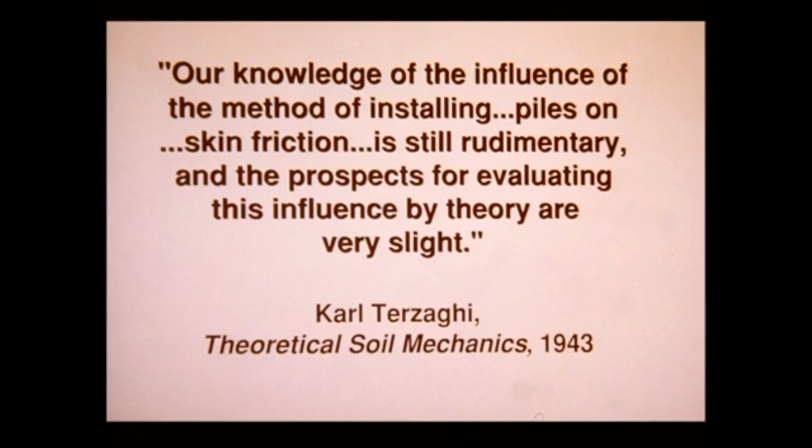Terzaghi admitted he didn't know much about skin friction, as he termed it. He developed a few graphs based on earth pressure theory, but he apparently didn't have much confidence that they were of practical use. Instead, he admonished his peers and students to perform site-specific load tests to measure skin friction, which of course remains good advice for us today.

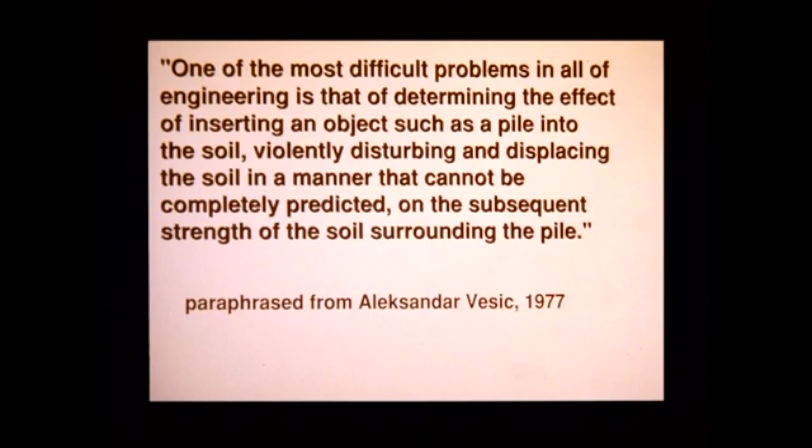Years later, Vesic expressed his appreciation of the difficulty of attacking the problem of pile resistance analytically, somewhat differently. Building on earlier work, he conceived and promoted the concept that the stress field in the vicinity of a pile could be estimated by invoking a relatively simple theoretical model in which we envision the soil to act as if it were being thrust outwards by an expanding cylindrical cavity. While that version of the theory didn't lead directly to practical solutions, it did provide a framework for understanding some of the soil properties that have a strong influence on skin friction, and we will from time to time refer to that theory.

An entirely different way of dealing with the problem might be to emulate our colleagues in other cultures by appealing to the piling deities before we begin construction. Sometimes when we deal with piling, this offers the best opportunity for success, but today we'll leave this approach to those who have employed and practiced it, and go on to some other solutions.

Coming to the present, I was privileged a few years ago to introduce Roy Olson as a Terzaghi lecturer. Roy is in the audience. I hope he doesn't mind me speaking of him, but he's an engineer who's had considerable influence on the development of methods for the design of axially loaded piles. When I asked him about the topic of his lecture, he told me he would speak on consolidation, for which, of course, he's also very well known and respected.

Roy told me he'd had considerable thought about talking about piles, but he'd finally decided he didn't want to open up what he called that can of worms. Well, considering the old fools and angels line, I decided that since Roy passed on the opportunity, it might be interesting at least to try to peek into the can of worms.

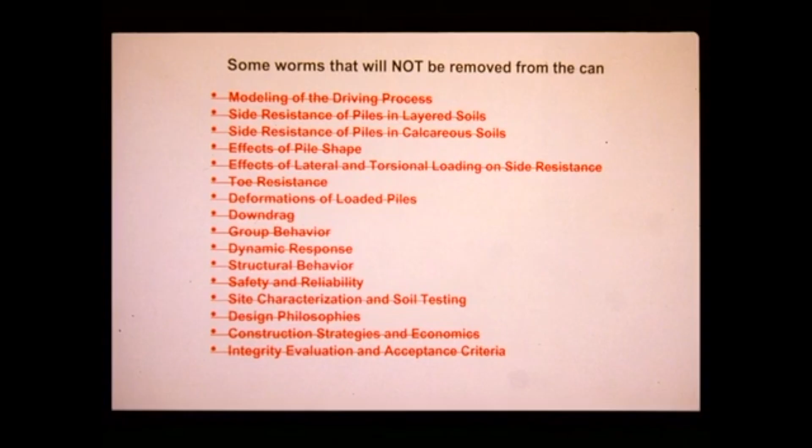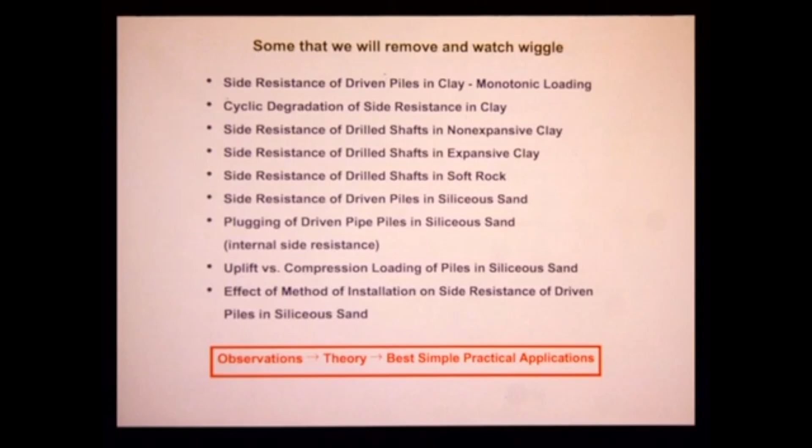So here we go. First of all, the problem of getting a comprehensive handle on side resistance, the term I'll use instead of skin friction, involves too many topics to cover today. I think it's appropriate right off the bat to declare what we're not going to cover. Not that these issues aren't important, but I'll leave them to other times. Considering the fact that my original version of the Terzaghi lecture ran about an hour and 25 minutes, I'll spare you some of these and we'll catch the main ones.

First, we're going to take a look at this topic of side resistance, looking at this little red box at the bottom, which I think is rather important. For you students, this is a good indication of how research is done, how engineering is done. We learn about engineering not from developing some grandiose mathematical model and then going out to verify it in the field, but rather we observe things. We try to use inductive reasoning to find out the underlying principles. So we go from what we observe to the underlying principles. We develop some sort of model, I call that theory, and from that we come back down using deduction to develop design inferences. So induction, deduction is the way we normally think.

Now, a lot of academics may not agree with this. Perhaps my opinions in this matter will provoke debates and spitting contests, but I think this is one of the purposes of a Terzaghi lecture. In our profession, the purpose of theory is to expand and generalize our observations and finally to help us produce guidelines for design, and I want to follow that theme throughout.

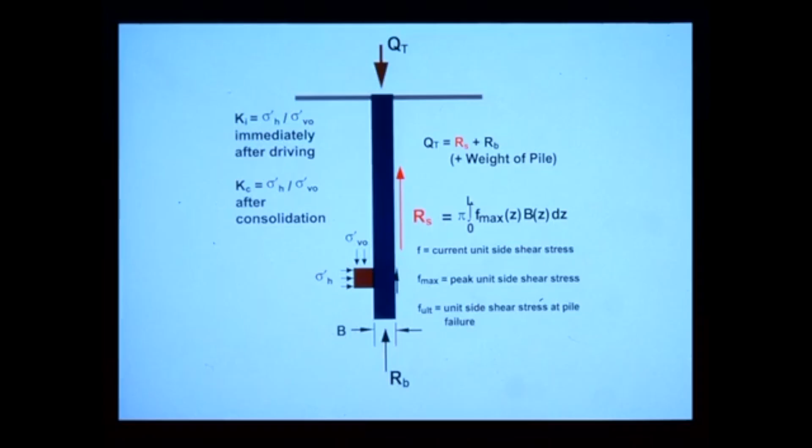The rub comes in evaluating these effective stresses, which can perhaps be estimated from the ambient vertical effective stresses, sigma prime V naught, and the earth pressure coefficients, which I term either K sub I or K sub C, and the shear strength parameters of the soil. I'll refer to K sub I and K sub C respectively, the earth pressure coefficients related to conditions immediately after installation and to conditions after all pore water pressures have stabilized, or after consolidation. Knowing these parameters, we can compute the peak unit side shearing resistance, which I term F max, as a function of depth, and then integrate that resistance over the surface of the pile to evaluate the total side resistance, the resisting force R sub S.

There are some complicating factors about this that make it not quite so simple, especially related to progressive failure that we'll look at later. One issue motivated by offshore development in the last 25 years or so is making static estimates of the resistance of very long driven piles in cohesive soils. To be sure, our static estimates can be improved by performing stress wave analyses on piles as they're driven, but pile lengths need to be ordered and construction operations have to be planned before such measurements can be made. So despite recent high-tech advances, stress wave analysis primarily, we still can't get around making estimates of R sub S from soil properties and good engineering judgment, perhaps.

Let's consider what Meyerhof had to say on the subject in his 1975 Terzaghi Lecture, published in '76. He described the underlying phenomena and then suggested the alpha and beta design methods for driven piles in saturated clay. In the alpha method, which is a total stress method, the changes in effective stress and soil structure brought about by the driving of the pile, and the effective stress path of the soil along the pile that it undergoes during installation and loading, are all collapsed into one factor called alpha, which in both derivation and application is empirical.

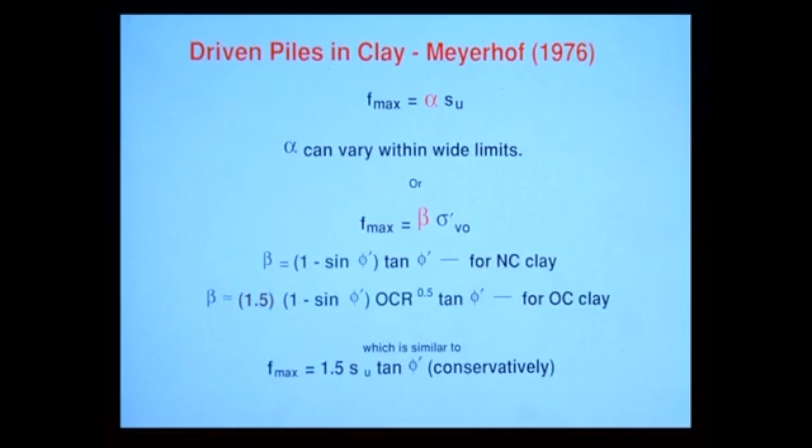So I've inserted the empirical multiplier of 1.5 here. I don't believe that Meyerhof was ever that specific, and it'll have some influence on some comparisons I make a little bit later. So that 1.5 is my factor and not his. But as the story unfolds, we can get a sense that the predictability of F max in over-consolidated clays may be a bit more uncertain than in normally consolidated clays.

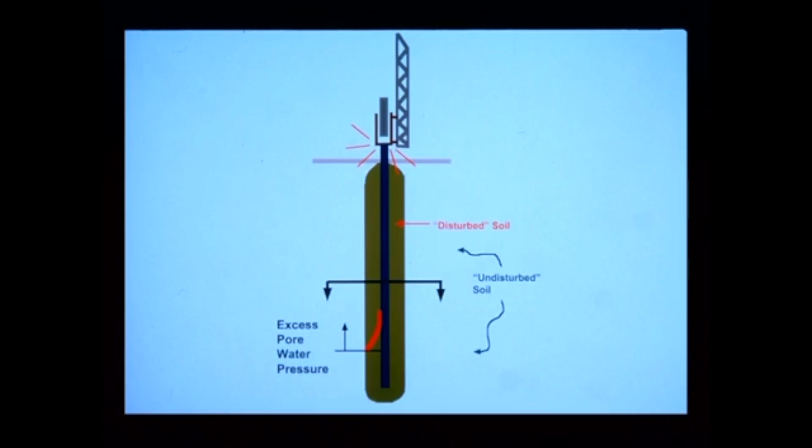You've got both the total stress and the pore water pressure changing. The elastically stressed soil in the blue, outside the disturbed or plastic zone, acts to restrain the plastic soil with perhaps something like a constant lateral stiffness. At least that's one view of the problem. Again, we'll assume for now that F max is proportional to the normal effective stress at the interface at the time the pile fails under axial loading. We're automatically assuming that the driving process destroys any cohesion that might exist, so the problem is completely frictional.

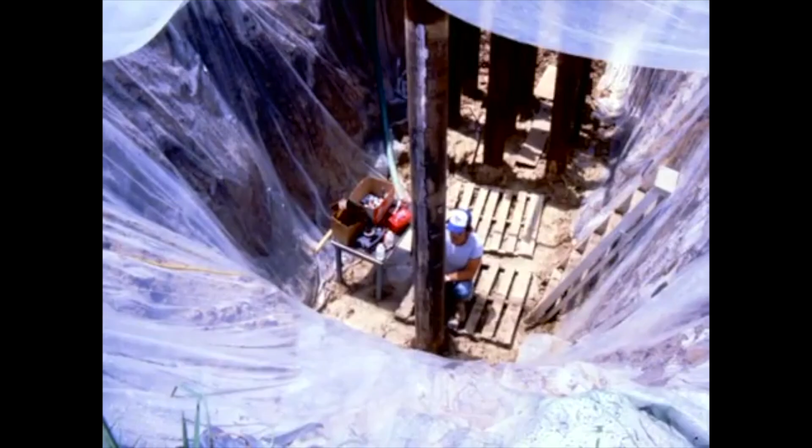Now, pursuing my observation-before-theory theme, some years ago we measured earth pressure coefficients in the ground at rest and against five heavily instrumented driven piles, and they were all closed-toe pipe piles, I might add. The site, which was in Houston, consisted of saturated clays of varying plasticity and had been over-consolidated by desiccation.

Consider this slide. These are our average measurements of earth pressure coefficients versus depth. The red line on the left is K naught. We can see that K sub I is clearly 2 to 3 times K naught near the middle of the pile -- that's after the pile has been driven. And K sub C is a little bit higher than K sub I.

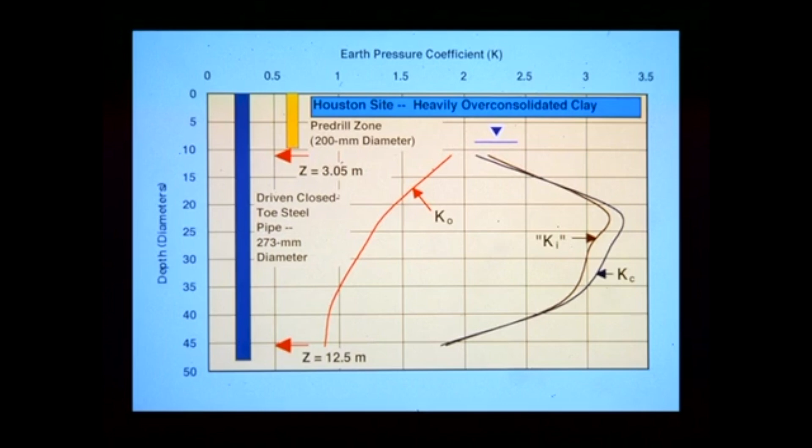I put K sub I in quotes here because by the time we could read the total and pore pressure cells, a good bit of pore pressure dissipation had already taken place, so that's really not the true value. As I say, K sub C was slightly larger than K sub I throughout most of the pile, indicating that the consolidation process resulted in an increase in effective stresses against the pile, which would of course imply time-dependent setup, which we were in fact able to measure. Remember, this is a rather heavily over-consolidated, very stiff clay.

With that sort of observational information, one is tempted to proceed directly from K sub C to F-max. For example, we can assume that there are no changes in pore pressures against the piles in the over-consolidated clay during slow monotonic loading, and that the highly disturbed clay is in a residual strength state, no cohesion. These assumptions let us invoke the equation in the blue box to calculate F-max.

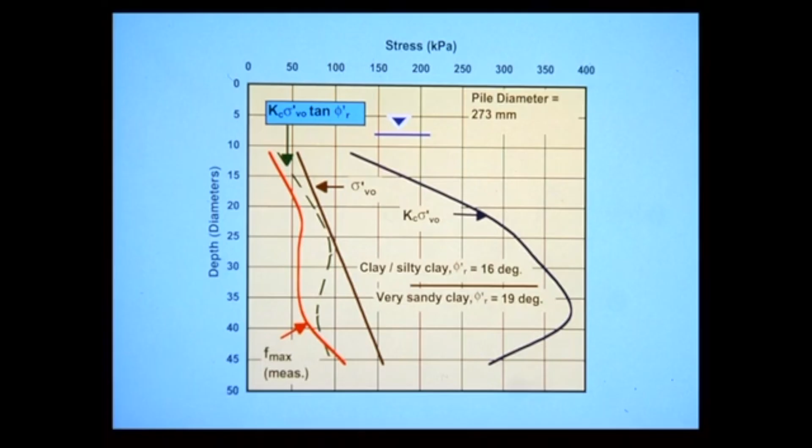If we measure K sub C, we use the residual effective angle of internal friction. Sigma prime V naught is a rather easy quantity to measure. We can make a prediction of skin friction versus depth, shown here in the dashed line. In fact, we're mildly successful in reproducing the measured values, shown in red, by doing this, but of course not completely, as we can see. This exercise demonstrates the importance of the parameter K sub C.

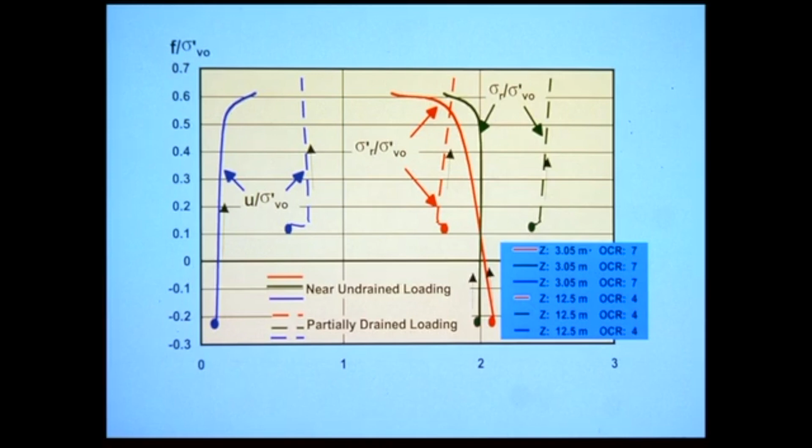If we look at the stress paths measured during compression loading of these piles, we see that our assumption regarding changes in effective stresses is not quite valid. In the upper part of the piles, where the clay is plastic, denoted by the solid lines, pore water pressure increased during shear loading and effective stresses became smaller, possibly explaining in part the over-prediction of F-max by the simple equation on the previous slide. Near the bottoms of the piles, where the clay was less plastic, rather sandy, denoted by the dashed lines, pore pressures and effective stresses were about as assumed. Very little change during loading.

Well, we seem to be getting a handle on the problem, right? Well, if we expand our view a little bit, things look somewhat different.

A consortium of oil companies sponsored a major load testing program for deep penetration piles in the UK a few years ago. A pile 0.76 meters in diameter, driven open-ended but plugged to a depth of about 59 meters, was tested at an over-consolidated clay site called Tilbrook Grange near Cambridge.

Our test on much shallower piles in Houston, in a formation known as the Beaumont clay, exhibited normalized stress paths that seemed to converge to a straight line along the point of slippage. These arrows indicate the Houston tests here. These two solid lines are the stress paths. But no such proportionality existed at the measured slip points for the Tilbrook test, here and here.

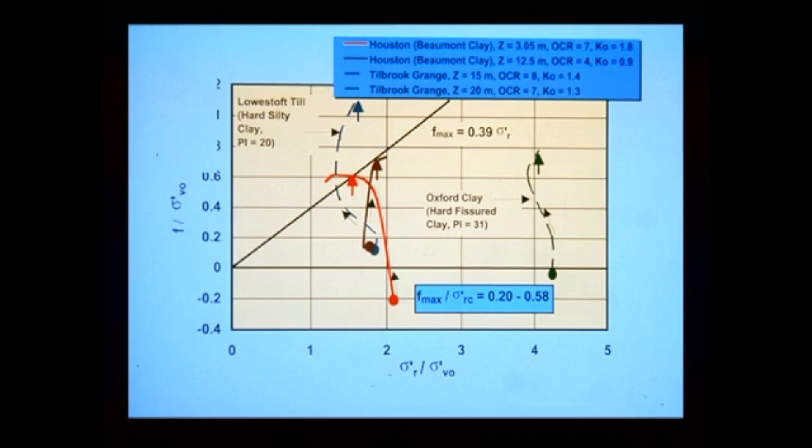Almost a reverse proportionality. There may have been a considerable true cohesion component of shear strength in the upper till, for some unexplained reason. We don't know.

The point is that the angle of wall friction between the soil and the pile may have been vastly different between the upper and lower parts of this formation, a theory that some people have advanced. But these two sets of tests in over-consolidated clay don't really show any discernible pattern in their normalized stress paths, suggesting that our simple K sub C sigma prime V tan phi model may not be too useful after all, and suggesting at the same time that the beta method, which works with effective stresses, carries with it considerable uncertainty in this type of soil.

And if you haven't noticed by now, I think I'm beginning to set up Professor Duncan's lecture.

Or perhaps the measurements at one or both sites were faulty. There's no evidence that this happened, but these measurements are difficult to make when you start to try to measure, particularly total stresses against piles or effective stresses. Any analyst, you people who work with finite element models and so forth, should be very cautious when assuming that the measured stresses or displacements against piles in soil masses are the ones you absolutely should be testing your analytical model against, because experimental measurements can be in error as much as your analytical model.

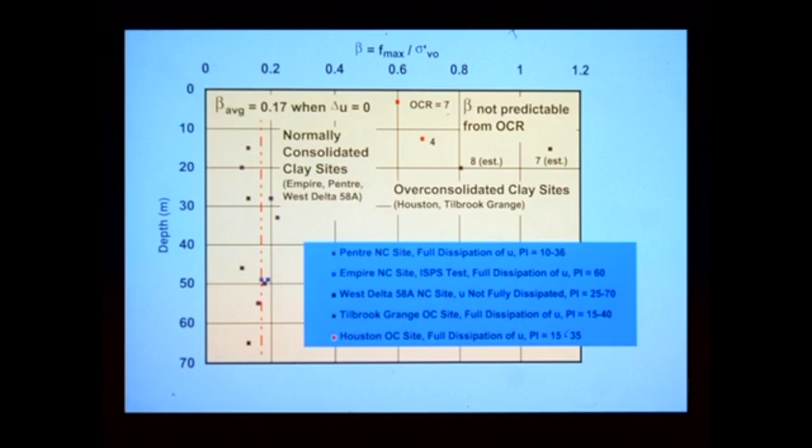Well, to put things in perspective, we measured values of beta versus depth for long full-size steel pipe piles at 3 normally consolidated and 2 over-consolidated clay sites. Beta appears to be nearly constant on the left for soils that are nearly normally consolidated, at a value of about 0.17. In over-consolidated clay, however, they're all over the place. This is for the Houston site and the Tilbrook Grange site, the two we've just talked about. Beta just doesn't appear to be a predictable function of either depth or overconsolidation ratio.

So at this point, our observations sort of fail us, and it's time to turn to modeling. The first efforts at purely analytical solutions for this problem in clay, particularly saturated clay, were sponsored by the oil industry to predict side resistance of very long piles, for which very little empirical data existed in the 1970s.

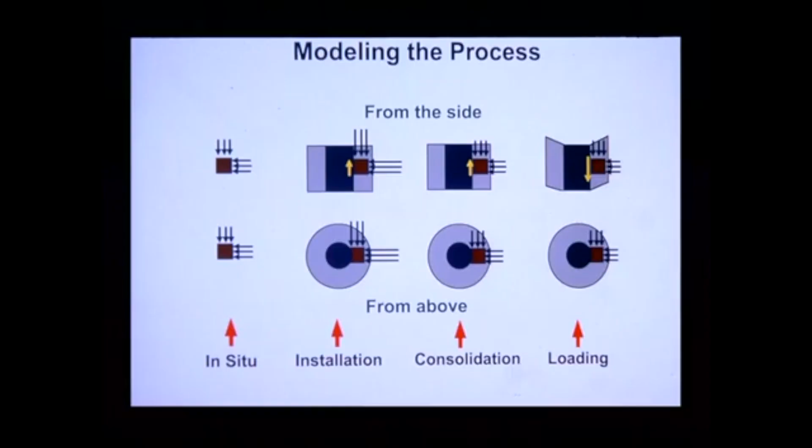The stresses change, usually reduce, and we'll let this image represent that. Most subsequent analytical models have gone through the same sort of process, although the particular procedure for modeling these effects are considerably different. Finally, we have the effect of loading over here in the fourth slide. This model was known widely at that time as the General Effective Stress Model, or the GESM.

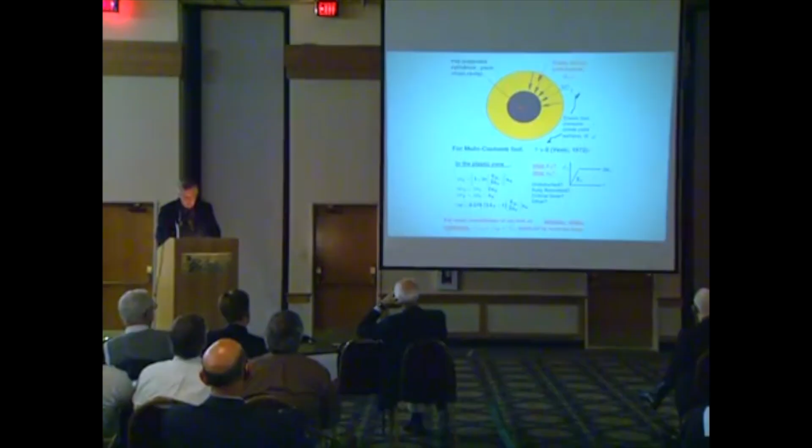Installation was modeled by the undrained expanding plane strain cavity method. The mean effective stress in the plastic zone was equated to the mean effective stress at the critical state at the void ratio encountered in the free field, which was then reduced empirically. It had to be, because it didn't work otherwise, by a factor of 0.6 to account for the extreme remolding that occurs in the driving of displacement piles. So we do have an empirical insertion into this otherwise completely analytical model.

The mean total stress came directly from elastic plastic von Mises procedures that are depicted here, and that mean stress was dependent upon the Young's modulus and the undrained shear strength of the soil. Of course, there could have been uncertainties about what value of S sub U should be used, undrained shear strength, and what value of E sub U should be used. There are obviously many possibilities, and so the method in terms of translating practical information to predictions of capacity has some uncertainty in it.

Radial consolidation was then modeled by considering the framework of the soil in the plastic zone to be elastic, compressible, and isotropic. The modulus of the soil varied in a radially nonlinear manner from a small magnitude at the pile surface to its undisturbed value at the outer edge of the plastic zone.

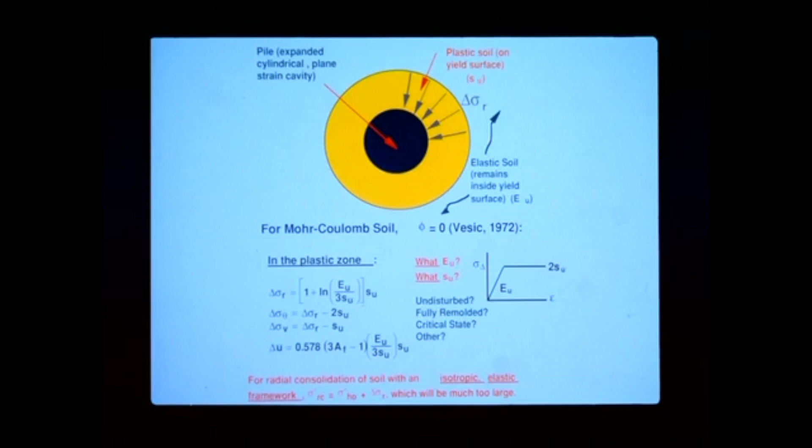With this assumption, the increase in mean effective stress at the pile-soil interface during consolidation was about a third of the initial excess pore water pressure that was generated due to pile installation. The soil is at or relatively near the critical state line after consolidation, according to this model. So it was assumed that at the interface, the mean effective stress at failure is equal to the mean effective stress after consolidation. Tests in Houston showed that's probably not quite true.

I'm personally more familiar with what we call the VECONS/AXIPLN model, which was developed by a student of mine, Heydinger. It's similar, very similar to the GESM, but it has a different way of including the empiricism. It empirically considers the soil in the plastic zone to have anisotropic stiffness rather than isotropic stiffness, with a ratio of tangential modulus to radial modulus of about 2.

Otherwise, the numerical solution of Leifer, which was used in the GESM, was also used to compute the effective stresses at the end of consolidation in this particular model. And what we see here are the conditions after pile installation, which represent the initial conditions for the consolidation modeling.

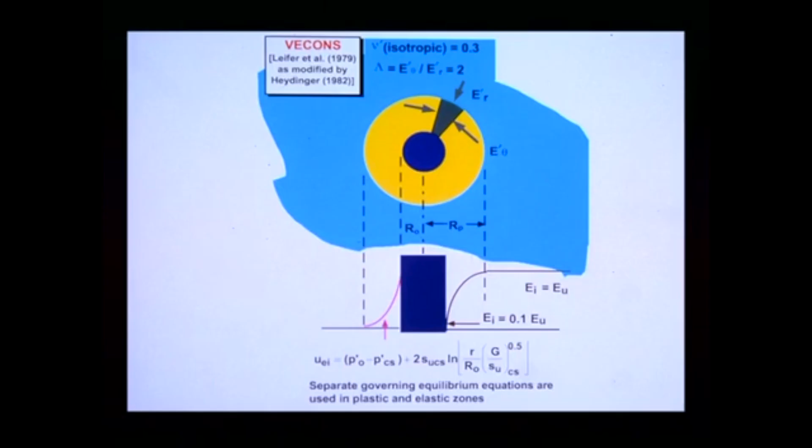If we used a constant isotropic Young's modulus in the yellow zone, the disturbed zone, we slide directly back into Terzaghi's one-dimensional consolidation theory and are forced to conclude that the change in effective normal stress on the face of the pile during consolidation is equal to the initial excess pore water pressure. Observations tell us this doesn't happen, that the effective stress changes are usually not that large. So as a minimum, it's necessary to use a model such as the GESM or VECONS with radially varying moduli to reproduce at least approximately what we observe.

This is a typical result from VECONS for the Houston overconsolidated clay site, which I talked about earlier. For reference, the ambient effective stresses are indicated along the right axis - here, the vertical stress and the horizontal stress. The horizontal stress at this site being slightly greater than the vertical stress at the depth at which we're doing the modeling. We predict significant increases in all three major principal effective stresses near the interface.

The biggest increase between driving and end of consolidation occurred in the tangential effective stress direction, because more volume change occurs near the interface where the greatest pore water pressure dissipation takes place, leading to arching of stresses in the tangential direction, particularly if you make that direction stiffer than the radial direction.

With this model, the radial effective stresses against the pile wall are about 2.4 times the ambient horizontal effective stress in the ground, which is consistent with the observations that I talked about earlier, which we made on the test piles. After determining these relations, Heydinger computed Fmax with a finite element code.

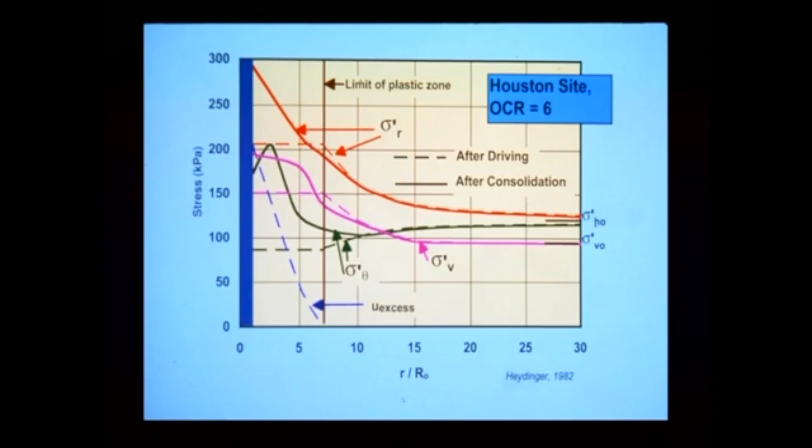The predictive results for VECONS for driven displacement piles and saturated clays with various stress histories are summarized here. The model appears to be reasonable over a fairly wide spectrum of soils, but again, it contains empiricisms.

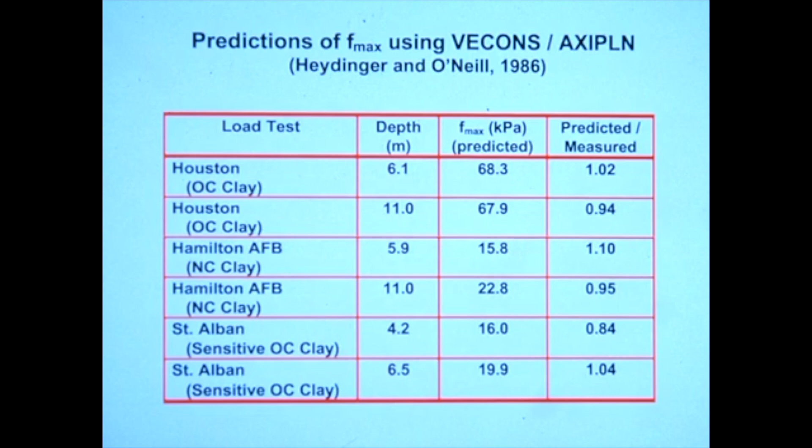A significant advance came with the coupling of Baligh's strain path method and the MIT E3 constitutive model in the late 1980s by Whittle. The strain path method offers a better solution for strain changes in soil around a pile as it penetrates, using the theory of analogy of a viscous irrotational fluid flowing past a blunt fixed object. It's very different from the cylindrical cavity theory used in previous models, the cylindrical cavity that just magically expands. We realize that's not what happens when we install a pile.

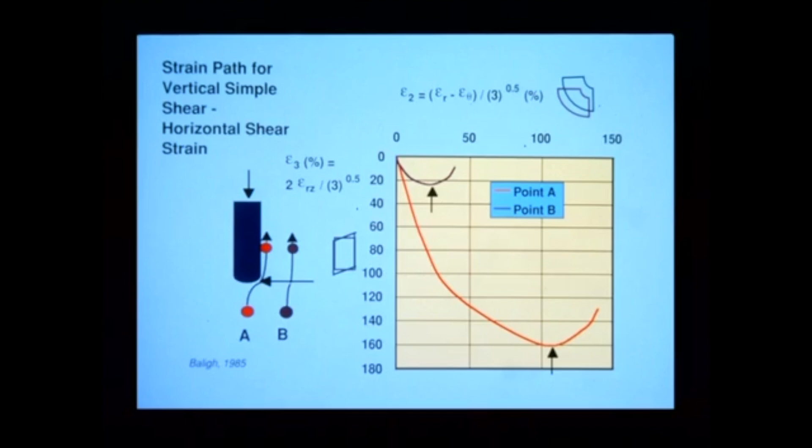The E3 constitutive model tracks those strains by assuming the soil is completely nonlinear. Irrecoverable strains are generated when stresses are reversed, which happens in many soils. It then tracks the stress-strain behavior of the soil framework as it consolidates around the pile during loading in a finite element environment, pretty much like the other methods, except that it uses a different constitutive model. There's no need in this model to assume any anisotropy in Young's moduli or any variations in Young's moduli with radial distance, as was done in the previous models.

This model predicts beta of about 0.10 for normally consolidated Boston blue clay and about 0.21 for lightly overconsolidated Boston blue clay, which pretty well bracket the values of 0.17 that I showed on the slide before. In fact, on the slide before, the values vary from about 0.1 to 0.21. So if we agree that some of the soils in those tests were slightly over-consolidated and not truly normally consolidated, then they're behaving much like the Boston blue clay would be predicted to behave using this model.

It's in this model, by the way, or in the beta method, if we apply this model to calculate beta for the beta method, it's extremely important that we know what K0 is. We need to be able to compute beta with a confident value of K0.

This model shows what happens when we try to put it into practice. It shows, first of all, that the radial consolidation of soil with a vertical shear stress, a residual stress against the pile, will produce a higher value of F-max than without a vertical shear stress, provided the subsequent loading doesn't reverse the direction of shear stress. Whittle analyzed, among other things, a series of uplift tests, which I've tried to summarize here,

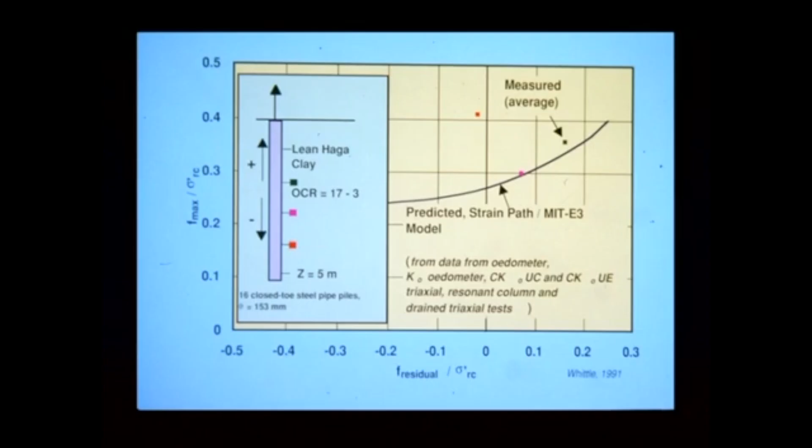The discrepancy at that point, which was the lower measuring point, was speculated to be the result of the layering and the boundary effects emanating from the toe, where you had an over-consolidated clay overlying a normally consolidated clay.

But here, nonetheless, are the range and measurements of F-max along the middle of the pile among the 16 identical piles that were tested. We compare the measurements and the predictions. The predictions by the MIT E3 model are completely theoretical. There's no empiricism built in, and we can see that it does a fairly good job of predicting what was measured if we forget about what's happening down near the pile tips.

We also see the prediction way over here, almost off scale, of the beta method that was proposed by Meyerhof. In this case, beta overpredicts F-max considerably, while the analytical method provides a greatly improved estimate in this over-consolidated clay.

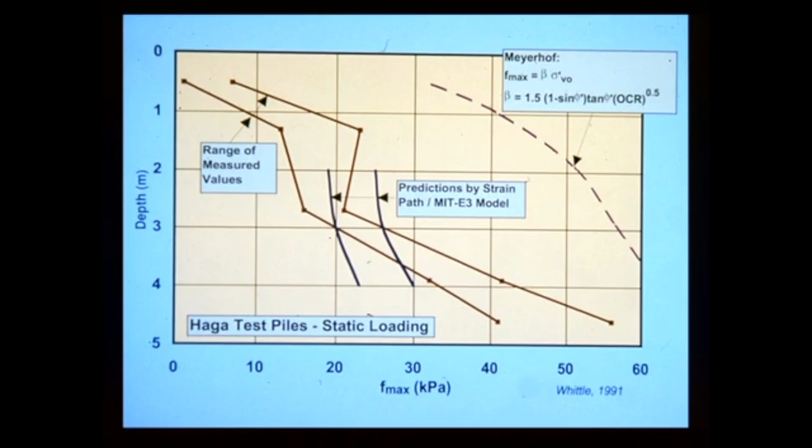Now that was a long worm. Remember, we're looking into Roy Olson's can of worms here. I want to extract a shorter worm.

The design value of unit side resistance, F ultimate, may not always be equal to F max, which we would predict by one of these models, or predict from load tests on short piles, because of strain softening perhaps and progressive failure as a compressible pile is loaded. There may also be a more subtle reason why F ultimate is not always equal to F max all along the pile, and it has to do with the installation process.

Here are the results of several compression loading tests on closed toe steel pipe piles, model piles, in uniform medium stiff clay. In this case, the piles were driven to a shallow depth, load tested to plunging failure, driven deeper, load tested to plunging failure, and so forth, all the while measuring the skin friction, end bearing, and such.

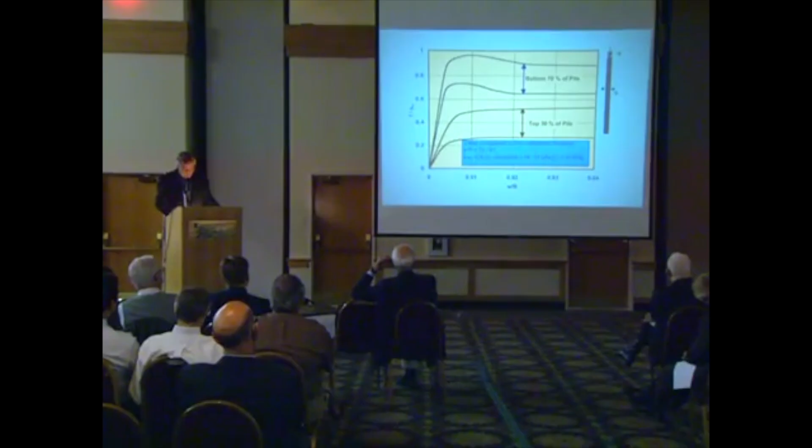Whatever the depth of penetration, F max in the upper 30% of the pile was always less than in the bottom 70%, regardless of the depth of penetration. This effect could be due to extreme destructuring of the soil at the interface from large accumulated strains, to reduced effective stresses from lateral expansion of the pile as the axial stress wave passes down, or to lateral motion of the pile from flexural waves produced by off-center hammer strikes, or a combination of these factors. These data suggest that R sub S, the shaft capacity, is about 15% less than one would obtain by integrating F max over the perimeter of the pile.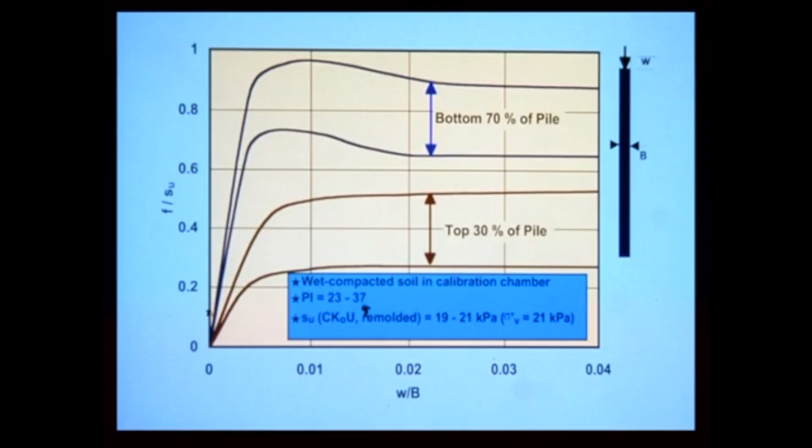If we assume, and this is not quite a correct assumption, that failure only progresses down from the head of the pile, and account for the fact that the pile is flexible, and assume deflection softening behavior in the relations relating F to pile displacement—relations that peak and then go back down to a residual value—we can consider this effect of progressive failure.

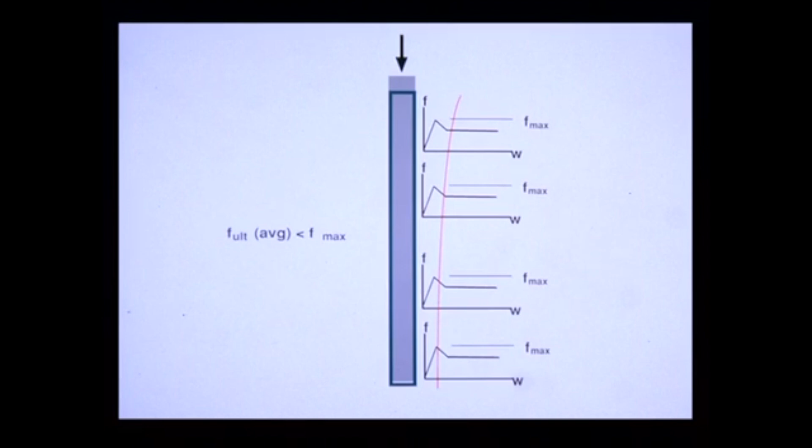We can do this by an explicit analysis of the pile and the soil using the well-known TZ analysis, a procedure proposed many years ago by Coyle and Reese. A simpler but less general way to determine the effect of progressive failure is to use the Pi3 method developed by Don Murff. This method considers the relative stiffness of the pile and the soil, the failure deformation W star, and a degradation parameter xi, all defined in this slide.

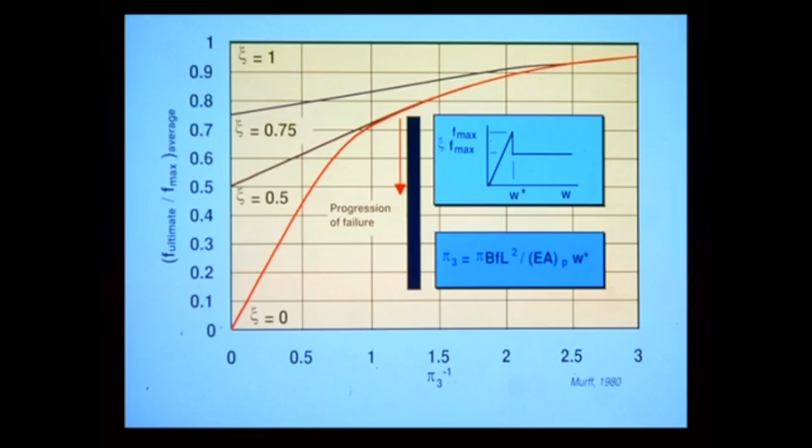Piles that are rigid relative to the soil have large values of Pi3 inverse and exhibit average values of F ultimate in the range of 90 to 100% of the average values of F max. But when the pile is flexible relative to the soil, we have small values of Pi3 inverse, and the ratio of F ultimate to F max becomes very sensitive to the degradation parameter xi. So that's something we need to try to establish.

To apply the method to practical problems, my opinion is that one might estimate xi by conducting consolidated, undrained, direct, simple shear tests to large strains on representative samples of remolded soil. So we understand everything there is to know in order to design piles for ultimate skin friction at failure, considering progressive failure and so forth in saturated clay.

For those of you who are students, we're going to find out that nothing in geotechnical engineering is ever that simple. I thank Dwayne Bogard for sharing this case with me. I want to consider a series of uplift load tests reported by Bogard and colleagues a couple of years ago at the OTC, on a pile at West Delta Block 58A offshore from the Mississippi River Delta. The pile was 0.76 meters in diameter, about 70 meters long, and the soil was normally consolidated or perhaps slightly under-consolidated—a plastic clay.

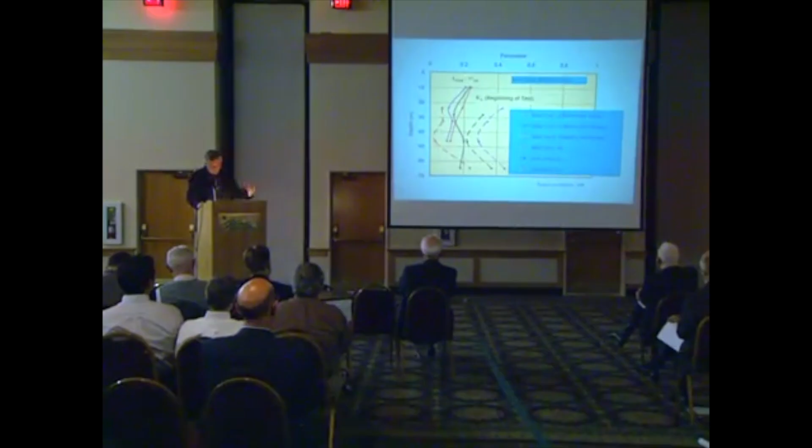One might guess that the soil is highly compressible and that each loading produces pore pressures that have to dissipate, causing additional consolidation and maybe associated arching around the pile, which continually reduces the effective stress at the interface and consequently continually reduces side resistance as we essentially load, unload, and so forth—or some other equally irrelevant explanation. Now, contrary to this explanation, what seems to be happening is quite the reverse: the skin friction is increasing.

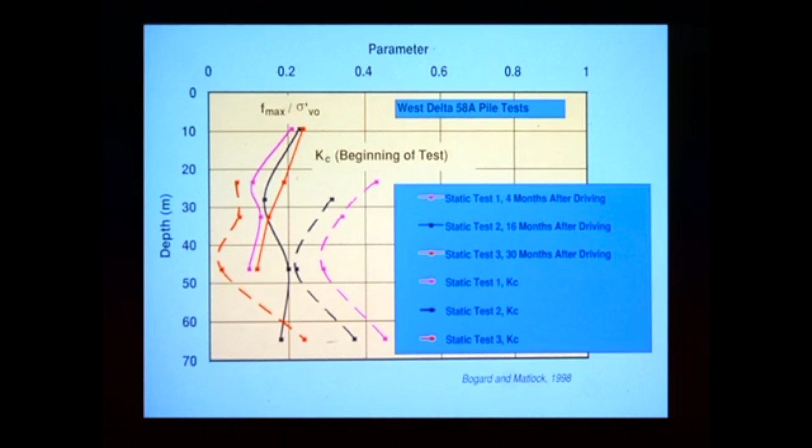This is what we had right after driving, and this is what occurred about 30 months later. The skin friction on average is at least as high or perhaps higher than it was initially, despite the fact that the effective stresses are reducing.

So much for the theory of effective stress—so we'll supersede Terzaghi. Or else, so much for being able to make reliable measurements of effective stresses against a pile. Now, I don't think this happened, because I regard the team that developed the instruments and made the measurements as the best in the world at their business.

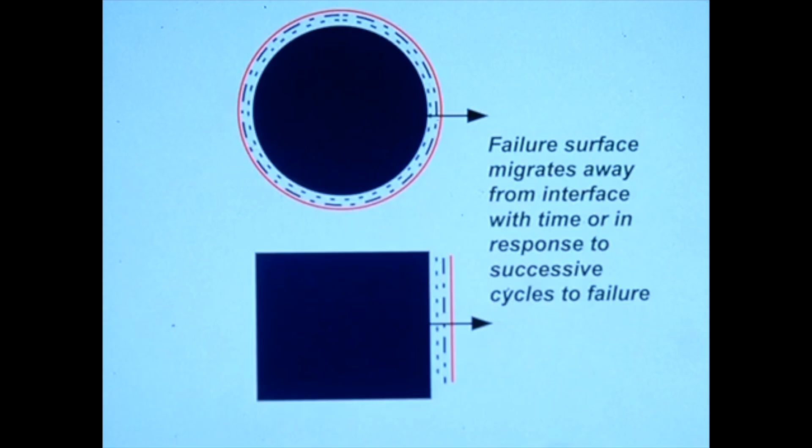So what's going on? Well, fortunately, the pile was extracted and examined after the third test, about 30 months after driving. As in most cases of this kind, a thick layer of clay, about 75 millimeters or 3 inches thick, was attached to the side of the pile, and it was hard. When the attached soil was dissected, evidence was found of several shear surfaces at varying distances from the face of the pile, apparently representing shearing surfaces produced by successive loadings that migrated away from the pile face.

The soil near the surface of the pile appeared to become denser or harden considerably with time, forcing the failure surface farther and farther away from the pile. If this happened, the effective stress measurements at the interface became irrelevant, in my opinion, because failure was occurring somewhere else along a radially expanding shear surface, which produced higher and higher overall resistances.

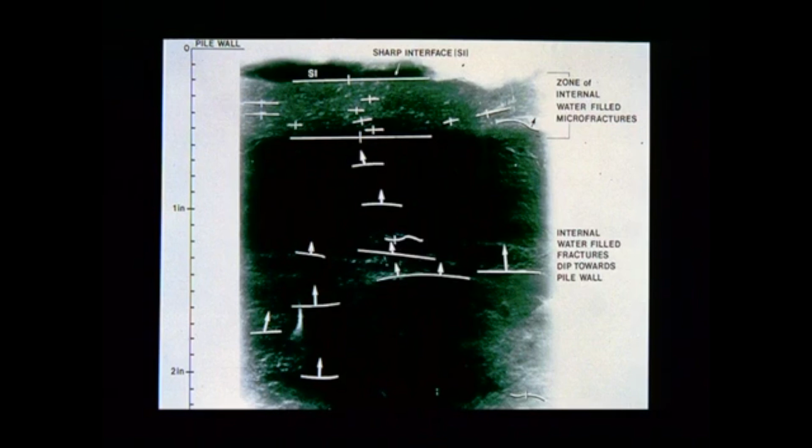The increased density quite possibly was caused by the precipitation of iron, and where that iron came from, if it did in fact come from the environment, is a mystery. Perhaps it was removed from the steel pile and deposited in the adjacent soil through galvanic action. The iron may have become a cementing agent, forcing the outward migration of the failure surface. If this happened, it's probably good news, only if we knew how to predict it.

So is this a solution to the mystery? Not really, because I'm also aware of another series of pile tests conducted over time in sandy silt, in which K sub C kept increasing with time and F max kept decreasing—exactly the opposite phenomenon of what we see here. Those data aren't available to us right now, so I'll simply say, go figure.

Well, it would be nice if we could model in detail every pile we install in a clay profile or a sand profile. I might use VCons because it's a program we developed. Others might use the MIT E3 model, or some might even use the GESM or some other model. There are many. But such modeling is only justified on projects near the outposts of our experience. For most projects, we have to drop back and use something more tractable given the resources at our disposal, often reverting to a correlative solution such as the alpha method.

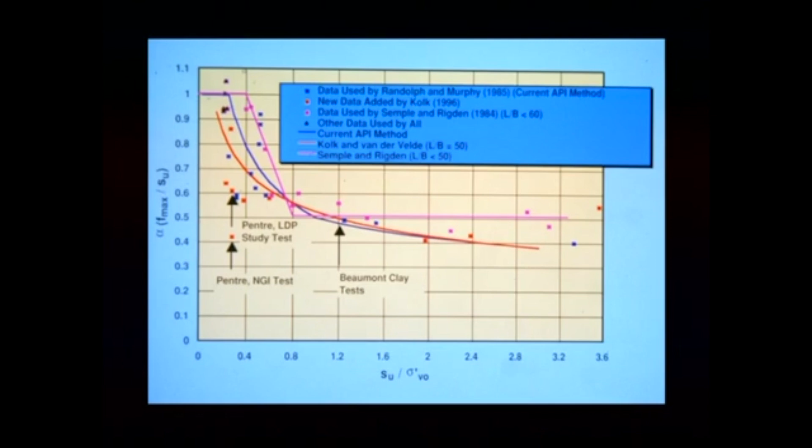The investigators in this particular project added two tests at a normally consolidated soil site called Pentre in the UK. The alpha factor exhibited by the NGI test pile was very, very low, even though the soil was normally consolidated, while the nearby LDP test pile, performed for the large diameter pile test project, had a much higher alpha factor. Kolk and van der Velde gave this a low weight when constructing the design curve because the pile had been driven in two distinct phases: driven about halfway, stopped, and then driven to full penetration. Perhaps this affected alpha, perhaps it didn't.

But there was considerable pore pressure dissipation between stages. This might be another one of those cases that could be added to our unsolved mysteries list.

These correlative methods apply to relatively short piles, with length to diameter ratios of about 50 or less. Each recognizes that lengthening the pile reduces F max to F ultimate. How this reduction is made varies from method to method. As much as a 30% reduction is proposed for very long piles by Semple and Rigden.

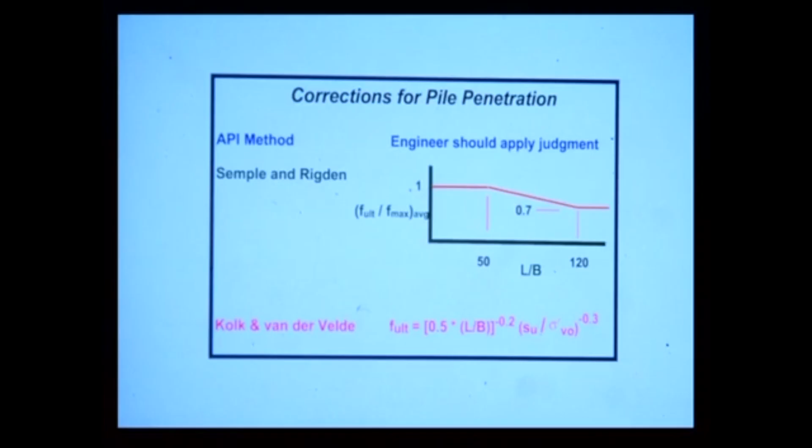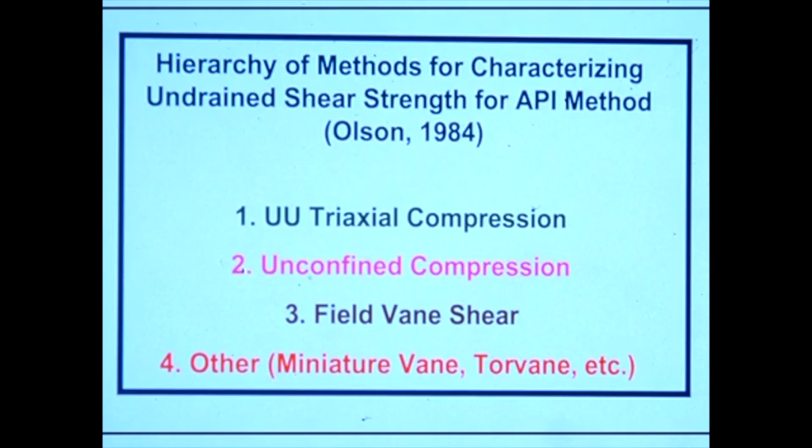This suggests that success in design is related to using tests for estimating S sub u that are equivalent to the tests used in developing the database, and I might add, as high up the ladder as possible.

Let's change our focus and look at drill shafts for a minute, particularly drill shafts in cohesive soils. Many engineers view a drill shaft as a non-displacement pile. I prefer to look at it as an entirely different animal.

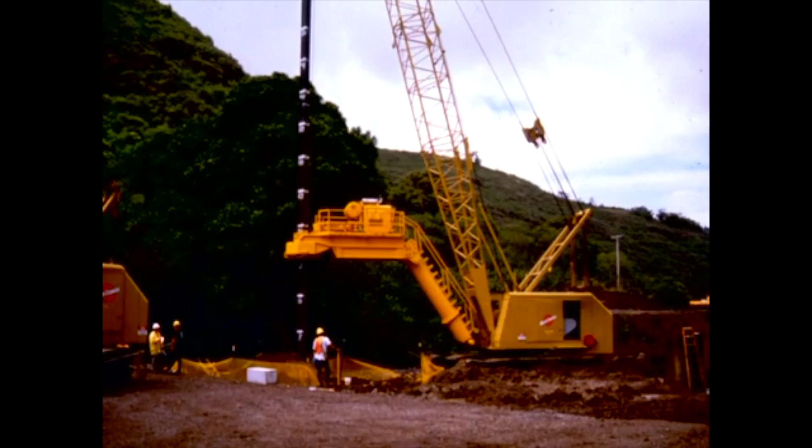After all, construction involves excavating a borehole with perhaps relatively less soil disturbance than with a driven pile, filling the borehole with fluid concrete, letting the concrete harden, and then loading the resulting deep foundation. Looked at from the perspective of the soil, this is a very different situation than occurs with driven piles, even non-displacement piles.

Researchers have not pursued this problem, at least to my knowledge, with the rigor that we pursued the problem of driven displacement piles with the GESM and MIT models and so forth. So this is a good PhD topic for someone.

But at least for now, we're left with the correlative methods for design, most of which are based on the familiar alpha concept. The extent to which drilling a borehole in over-consolidated clay affects the shear wave velocity as one moves away from the wall is demonstrated in this graph, obtained using SASW techniques by Kalinski and Stokoe at the University of Houston Experimentation Facility.

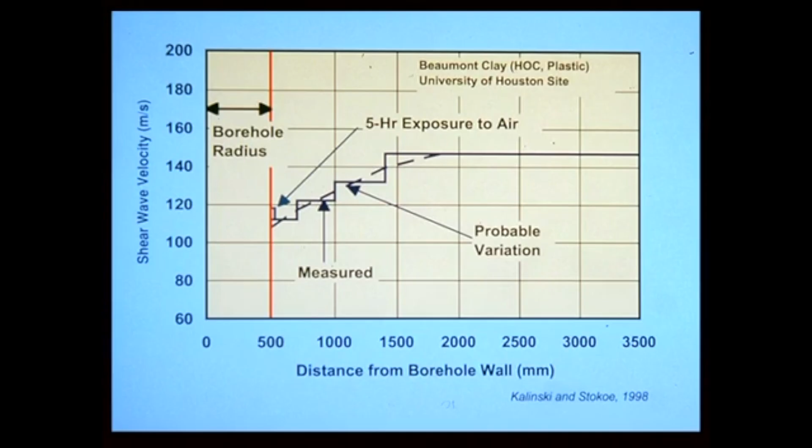We can see that for a drill shaft, the effect of stress relief is quite pronounced. It occurs to a distance of 2 to 3 borehole radii away from the face of the borehole. By the way, this scale is incorrect - this is distance from the center of the borehole rather than from the borehole wall. But we can see that one of these squares is a radius, and we go about 2.5 radii away before the shear wave velocity gets back to the free field velocity.

At the eventual concrete-soil interface, the wave velocities are only about 70% of what they were in the free field. If we make the reasonable assumption, backed up by laboratory tests, that the shear wave velocity is roughly proportional to the square root of the undrained shear strength of the soil, we conclude that the undrained shear strength of the soil has been reduced to about half of its in situ value at the borehole wall by the drilling and stress relief processes.

Considering other things that can influence the shear strength of a soil when a drill shaft is installed, Lymon Reese pointed out at his 1976 Terzaghi Lecture that once concrete has been placed, water can migrate from the concrete into the soil. This effect is likely to be more pronounced when water-cement ratios are much higher than necessary for hydration of the cement and when the soil has a high level of suction, that is to say when it's dry. In a clay, this effect produces an additional decrease in shear strength, and it may produce swelling.

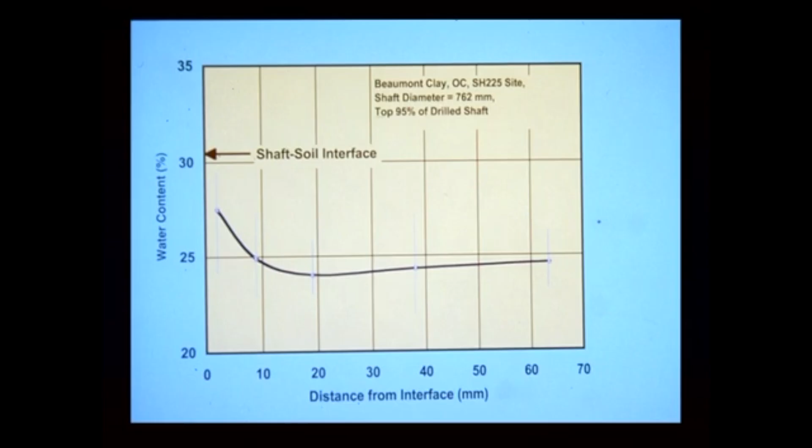These data are from samples cast against the face of a drill shaft in stiff Beaumont clay in situ. This is not a lab test, but an in situ test. And it demonstrates clearly the effect, where you have a higher water content immediately adjacent to the face of the concrete wall. Water-cement ratio, by the way, in this particular case that was used to maintain concrete fluidity was 0.60, and we would hope that you would not use such high water-cement ratios now.

In order to reduce that effect, we ought to be using water reducers to reduce water-cement ratios to the range of perhaps 0.4 to 0.45. But that's a materials problem.

So without an analytical method to predict all of these effects and others that I've just talked about, we return to the alpha correlation to help us with static design. And here's one that I proposed for the second edition of the Federal Highway Administration Drill Shaft Manual, which has just hit the streets. It's based on a simple analysis of parts of 2 databases.

I say parts of 2 databases because I've tossed out all the tests at sites where the average indicated undrained shear strength is less than about half an atmosphere, since drill shafts for bridge foundations are not often used in such soils. The well-known alpha correlation of Kulhawy and his colleagues for drill shafts is somewhat different from this one, particularly at the low end of the shear strength axis, because some such tests are included in his database, and he concludes that the alpha factor for very low shear strength is higher than I've shown here.

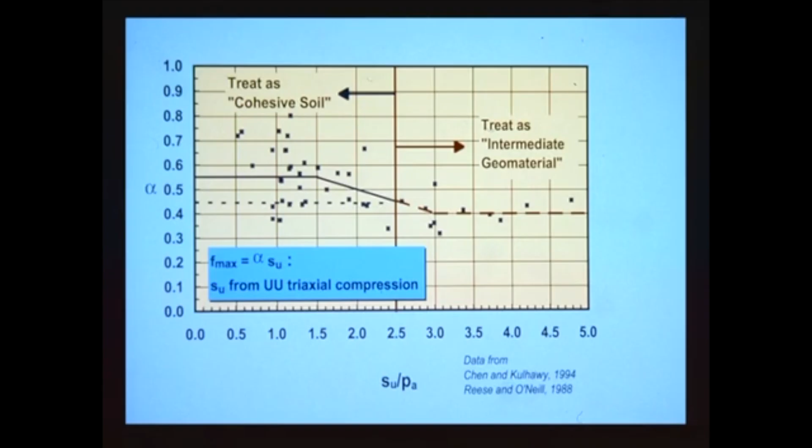In any event, this correlation assumes that one uses the results of UU triaxial compression test to determine S sub U. Beyond S sub U of about 2.5 atmospheres, we treat the geomaterial as intermediate or something between a hard soil and a soft rock, where we might use something different than this to evaluate alpha.

Alpha is about as uncertain here as in driven piles for both similar and different reasons, and the uncertainty, which I'm sure Dr. Duncan is going to talk about, is something that we should always keep in mind as geotechnical engineers.

The similar reasons are associated with characterization of shear strength profiles. In drill shafts, alpha is affected by the time the borehole is open, the roughness of the borehole, the fluid pressures in the concrete, the amount of excess water in the concrete, and perhaps other factors. These effects are of little concern with driven piles, of course, which is the reason for my stating that drill shafts are different animals.

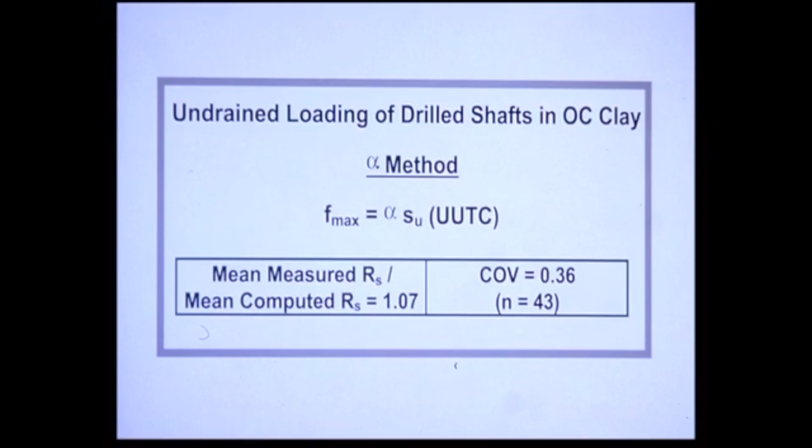And if Professor Duncan will forgive me, I want to look at a couple of statistics. If we look at the databases from which we drew this last figure, we can make some simple statistical calculations and conclude that this particular alpha method is slightly conservatively biased. On the average, it predicts slightly less capacity than we've measured, but it has a relatively high coefficient of variation, in this case 0.36. Now, for those of you who haven't taken statistics in a year or so, the coefficient of variation is just the standard deviation of the data divided by the mean value.

In order to reduce the coefficient of variation, and of course that affects what kind of factor of safety we use and what kind of resistance factor we use if we're working in an LRFD context. I won't get into that, but it's something that's very intriguing.

In order to reduce the coefficient of variation, which we'd like to do, and increase our reliability of our side resistance estimates, we might go back and interpret our load test database according to the beta method, because it's an effective stress method, and we all know that effective stresses are better than total stresses, right?

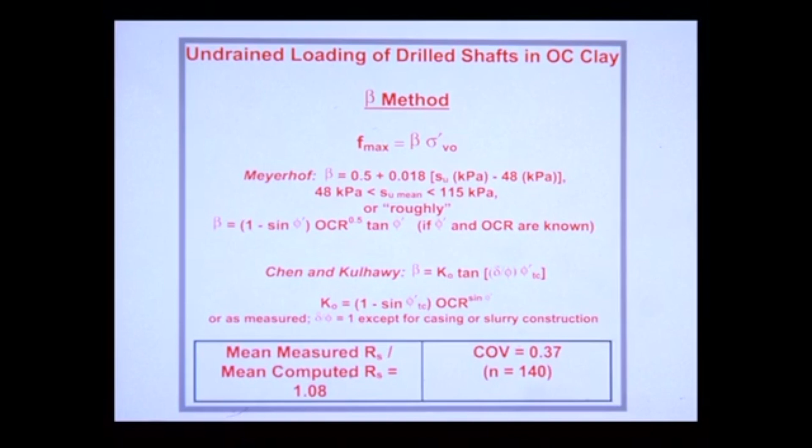Well, Meyerhof suggested this method that I won't read here, but it's similar to the beta method for piles, slightly different, in his 1975 Terzaghi Lecture, and more recently Kulhawy and his colleagues have developed an improved version. However, if we look at the database of Chen and Kulhawy, we conclude virtually the same thing that we concluded about the alpha method. It's biased slightly conservatively and has a coefficient of variation between 0.35 and 0.4.

Again, the uncertainty seems to lie largely in the effect of construction, so that at the present there's really no compelling reason to use the beta method in preference to the alpha method when designing drill shafts in stiff soils over consolidated clays, even though it might appear to or appeal to our good sense of soil mechanics.

Drill shafts offer obvious advantages when we have to put the foundation into rock. I'll conclude my foray into drill shafts and cohesive geomaterials by discussing this subject briefly, at least regarding soft rock, which I arbitrarily define as rock with a compressive strength of about half that of ordinary concrete.

Two factors have long been understood intuitively to affect side resistance in such foundations: the roughness of the cut of the borehole and the presence of smeared or degraded material at the interface between the concrete and the rock. Soil-like smeared material is produced by drilling in many argillaceous or clay-like soft rocks when free water is present in the borehole. Khalid Hassan, one of my former graduate students, is one of a number of investigators who looked into one or both of these issues in some detail.

Since I'm familiar with his work, I'll make some comments based on his studies, which were performed in the field and also by using finite element modeling of soft rock with frictional, drained, and dilational interfaces. And I'll describe the materials for simplicity in terms of their unconfined compression strengths.

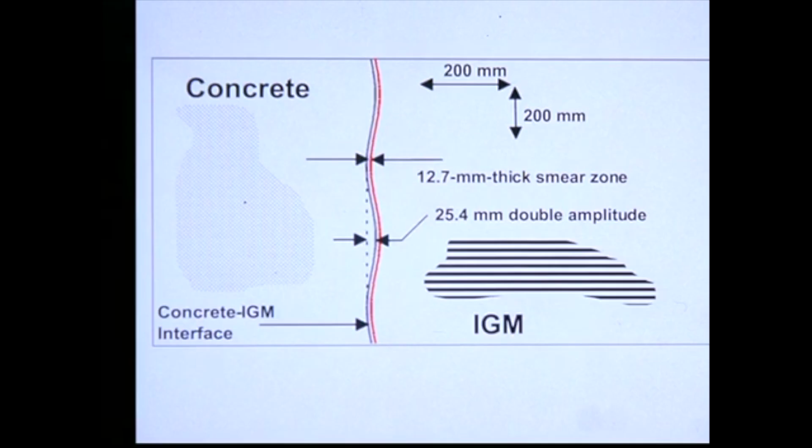If we analyze the interaction between an axially loaded drill shaft and that kind of soft rock using a reasonable constitutive model for the rock, we come up with a typical set of shear stress contours around the rock asperities that look like this. The red zones represent gouge zones in the soft rock. This is the rock, this is the concrete. What seems to be happening is something like a side bearing failure under these rock asperities, where there's a circular or rotational failure around the asperities.

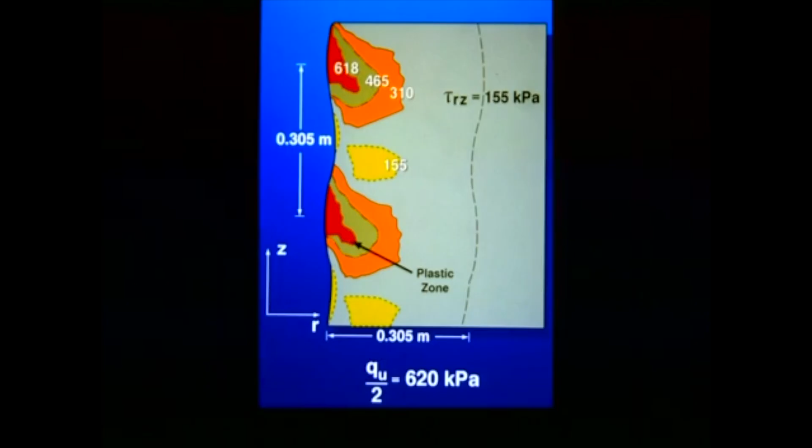We're developing much higher than the undrained shear strength here because there's some drainage in the rock which consolidates very quickly, but very little shearing resistance near the bases of the rock asperities. On the whole, on the average, for fortuitous reasons, we end up with an average side shearing resistance that's something in the order of half of the undrained shear strength of the rock, or unconfined compression strength of the rock, I should say.

The complete modeling sequence produces the relation of average shear stress F to settlement shown here. I think this is fairly interesting. The red line represents a socket that's 6 meters long and about 0.6 meters in diameter in the rock described on this slide, which I won't take the time to get into.

If we remove the roughness pattern and assume a smooth frictional interface, we get the second curve from the left, this dashed line. We can see that this roughness pattern actually triples the skin friction at a settlement of 25 millimeters, or roughly 1 inch. So roughness in soft rock is extremely important.

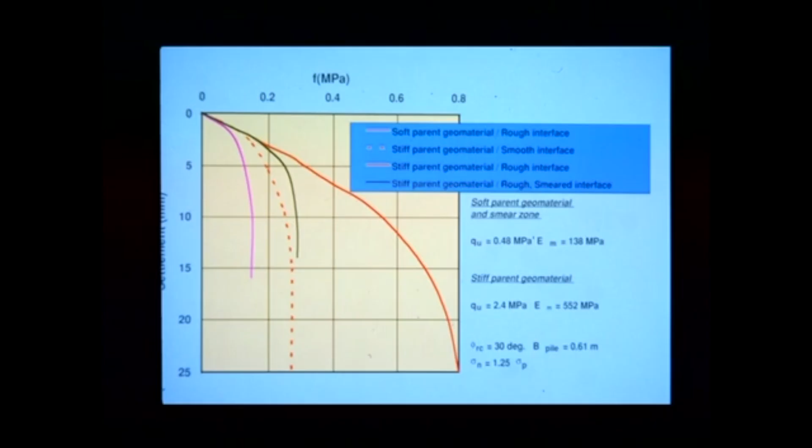I'll not talk about this curve here, but I'll talk about this one. If we have a rough interface and we put smear, a soil-like material that has only 20% of the shear strength of the rock in the zone between the concrete and the rock, even though the asperities are much thicker than the thickness of the smeared material, we get a load settlement curve like this, in which we get virtually no effect from the roughness.

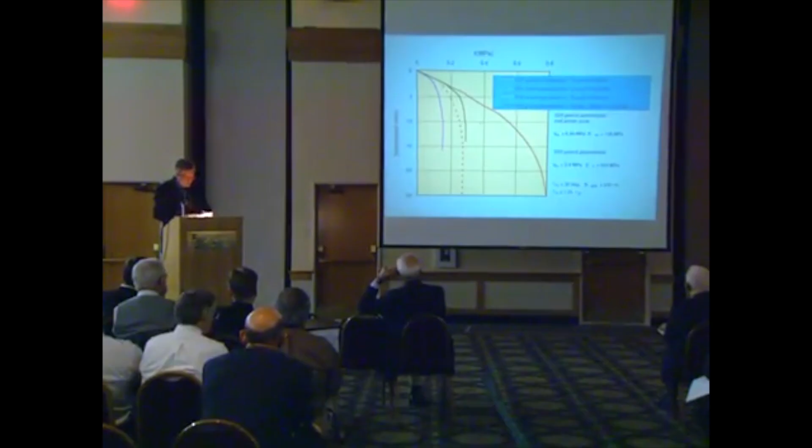So keeping the sides of the borehole clean is extremely important. I'll make a strong statement here that some of the drilling practices we use in Texas are rather bad. We allow our contractors to dump water in the hole to help make the soil or rock sticky so they can get it out easily. This just contributes to this problem. We don't force contractors to case off surface seeps and so forth, which we should do. We need to keep the rock as free from these kinds of things as possible.

Let me relate a short case history just to give you some feel for roughness.

This is a case history in which soft rock with very low RQD was encountered. It was time to punt.

The RQD values were from about 0 to 30%, but we did have on average about 75% to 80% recovery. The mean unconfined strength of the harder sections of rock that could be recovered and tested was about 3.6 megapascals. The rock was a series of vertically stacked lava flows that over time had weathered extremely differentially, such that the coefficient of variation of the compressive strengths of the rock cores recovered, not including seams, was still about 0.6.

The design value for unconfined strength of the intact rock was selected such that we would have 80% confidence that the actual value of shear strength for the intact rock would be higher than the design value. This allows us to use in an ASD process factors of safety equivalent to those used for more uniform sites.

If only we could assess the effect of what we didn't have a clue about, the materials in the seams between the intact rock. So we installed a test shaft in a 1.6 meter diameter borehole. It was artificially roughened and calipered.

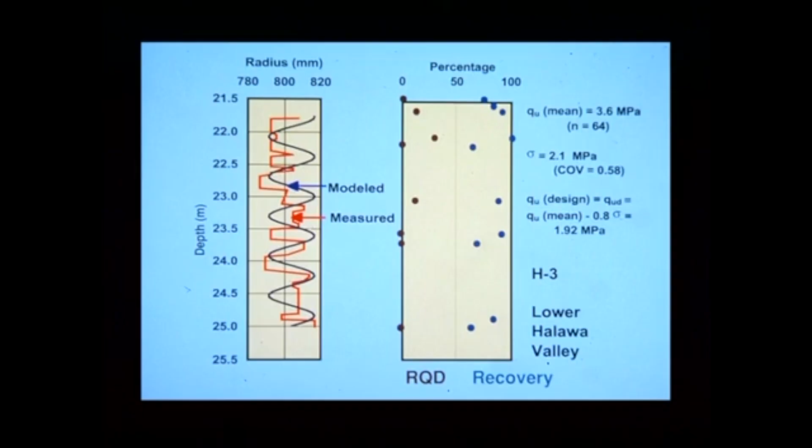As you can see here, the red line represents the actual measured roughness of the borehole. It wasn't a series of very nice shear keys, but it was rough, and it approximated very crudely the roughness pattern that we were able to model in the computer, which was sinusoidal. Not bad in terms of asperity amplitudes, but not great in terms of shapes.

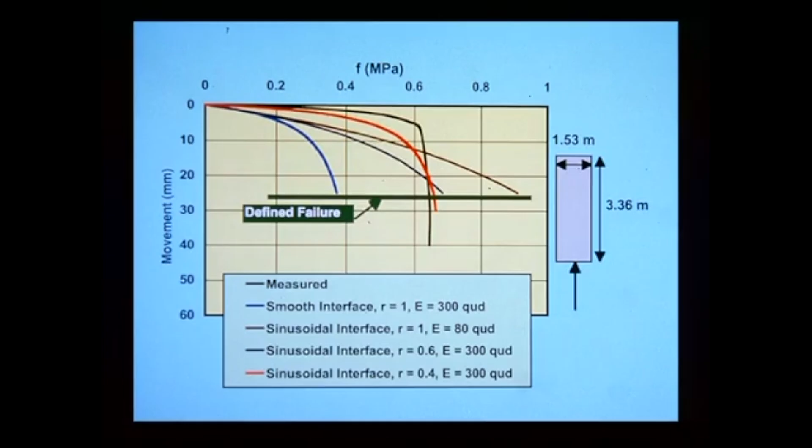To make a long story short, using an appropriate value of Young's modulus for the intact rock, we concluded that we had to, in our mass model, reduce the strength of the intact rock to 40% of Q sub U to produce behavior reasonably similar to that measured.

We did a pretty good job, except that the initial slope of the load movement curve was too soft, and part of the stiffness mismatch was because the sinusoidal model only considers long wavelength effects, whereas we know that some shorter wavelength disparities existed in our borehole profile. These tend to stiffen the initial load movement response because they shear off at small deflections.

So with this approach, we were justified in using R equal to 0.4 for this terribly heterogeneous rock for design where we had a low RQD. This was the only way we could back into some reasonable effect of the seams.

I've often asked if a load test can be run to measure side resistance for a large diameter drill shaft using a small diameter socket. That's a very practical problem. If we can, it's very cheap to make these measurements.

And the answer is probably yes, if you don't count on interface dilation to provide part of the side resistance—the asperities shoving the rock aside, creating excessive or higher effective stresses and increasing the shearing resistance. But that can be wasteful.

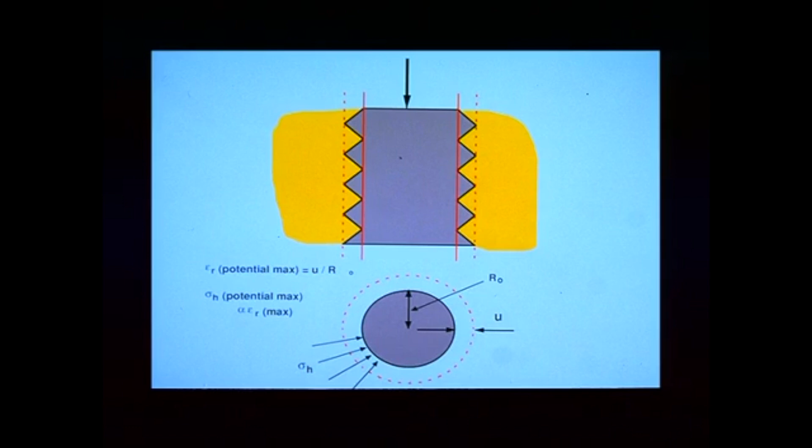If we use design values for side resistance associated with a naturally or artificially roughened interface, we need to consider the effect of diameter, as illustrated in simplistic terms in this figure. Loading thrusts the rock radially outwards and increases the normal effective stress along the interface. If we assume the rock to be elastic, which is an oversimplification, the radial stress is proportional to the heights of the asperities and inversely proportional to the radius of the socket, provided the asperities don't shear off, which is another oversimplification.

But given that set of assumptions for a given roughness pattern, the smaller the diameter of the socket, the higher the value of normal interface stress and the higher the value of Fmax for a given asperity height and wavelength.

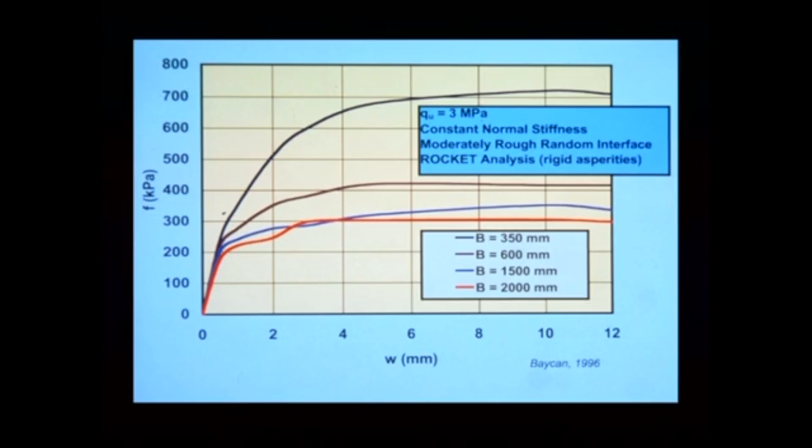The effect is illustrated here using results from a computer program called Rocket, developed by my colleagues in Australia. A 2 meter diameter socket with a moderately rough interface and soft rock develops a maximum side resistance here, only about 42% of the maximum side resistance developed in roughly a 1 foot diameter socket. So use of results from a test on a small socket to design the large socket without consideration of this scale effect would be unwise, especially if we don't have any smear material, which is what we have here.

I might add that work we've done experimentally tends to back up this model, at least in terms of the direction of movement. The larger the diameter, the smaller the shearing resistance. So here we come to practical considerations.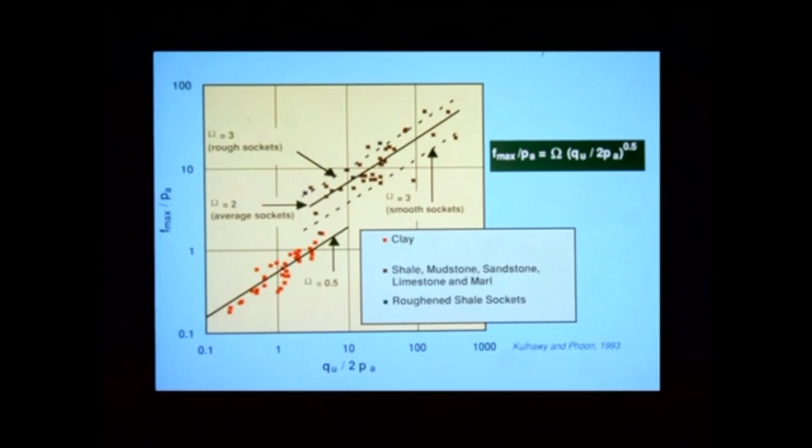Test shaft diameter and sampling effects may very well contribute to this, because the test over here is for fairly large diameter shafts, the test over here for fairly small diameter, and they have not considered the diameter effect in their equation. However, the little relation given in the upper right-hand side of the slide, which considers a roughness factor, provides a good preliminary design formula for drill shaft sockets in soft rock.

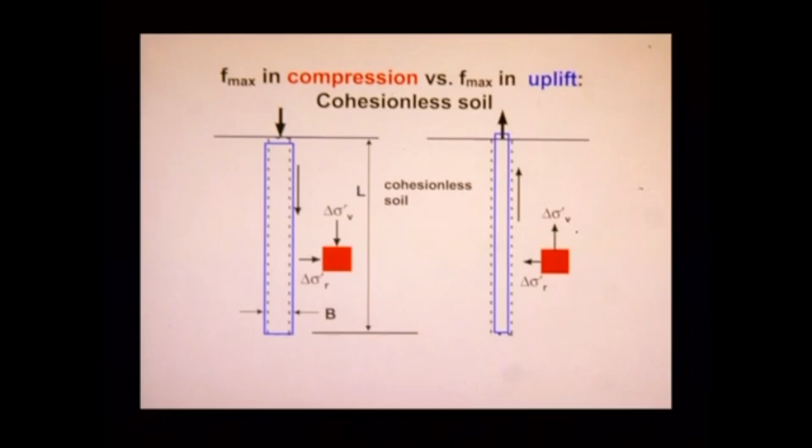A siliceous sand - we won't get into the issue of calcareous sands. U.S. engineers have long held that there's no difference and have written the API guidelines so that this point of view is reflected. Others cite evidence to the contrary.

For example, when the pile is loaded in uplift, there's a Poisson's effect in which the pile will likely contract a little bit, which would reduce the radial effective stress at the interface. And since the pile stretches, there's also a net reduction in the vertical effective stress in the soil surrounding the pile at any depth, which also reduces its shear strength.

The vertical effective stress increases in the soil near the pile at a given level due to load transfer from higher elevations when a flexible pile is loaded in compression. These are measurements of that effect, made in a large pressure chamber, and conversely they decrease when the pile is loaded in uplift.

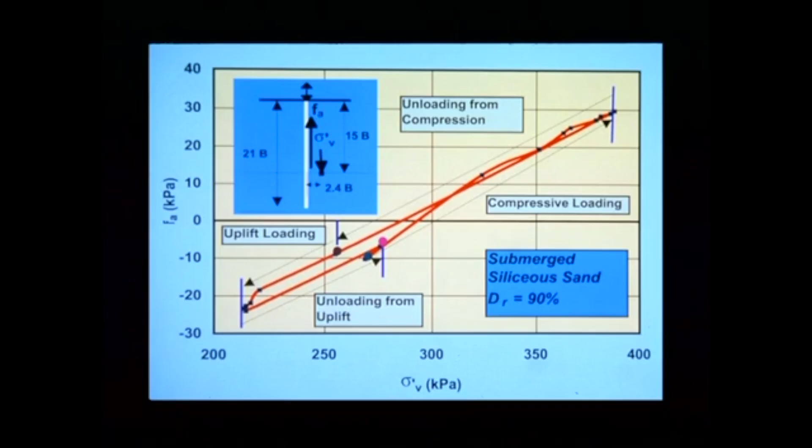These are typical readings. Now, the change in vertical effective stress adjacent to the pile is essentially proportional to the value of the average side load transfer above the level of interest, termed here F sub A, and the effect isn't enormous. We're talking about maybe less than 10% changes in vertical effective stress, 10% of the average side resistance above the point.

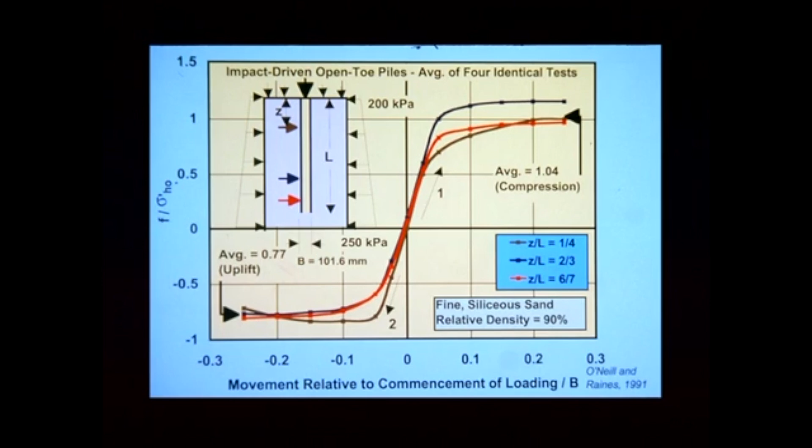However, the increase or decrease in vertical effective stress is clearly observable, and therefore in consideration of this fact, we should take a look at the TZ curves that we might measure in the piles in which we measure these stresses. We can see, in fact, in 4 tests, looking at 3 different levels here, it's very clear that we're getting higher skin friction, around 1.04 ratio to the horizontal effective stress in compression compared to about 0.77 in uplift. That is to say that the skin friction in uplift is about 75% of what it is in compression.

There's no doubt about it. It's a very clear phenomenon, and yet people do not believe it. I'll leave it at that. Some people in the audience don't believe it. But we can discuss that at Jean-Louis' house and break some vases and glasses and things like that.

Let me conclude by saying that engineering managers may view some of the methods we've talked about as being too complex, too expensive. After all, we might have to have pressure meter data to get our moduli, K-naught factors, CPT data. We certainly need to have a handle on the shear modulus variation in the soil, and we need to make some estimates perhaps of the roughness of the pile surface, either a drill shaft or perhaps a driven pile, to make accurate calculations of what the shearing resistance is going to be on the interface.

We also have to recognize that F-max varies with position along the pile, direction of loading, and perhaps with the toe condition, which I haven't discussed. I'll also submit that F-max depends upon the method of installation. So just use N over 50 and get on with being productive - we don't want to do all these calculations.

Use of methods like these, which I think reflect reality better than some of the old methods we're all locked into, requires more time and effort by knowledgeable engineers. Higher engineering cost, if you will, that in the end will lead to greater economy and greater safety in the constructed foundation.